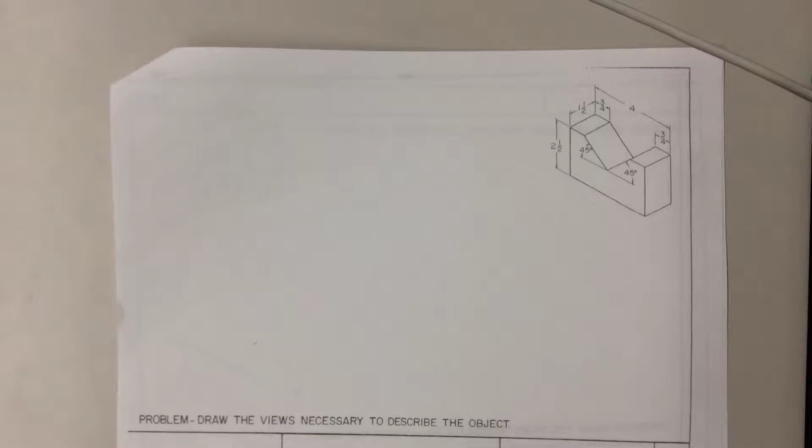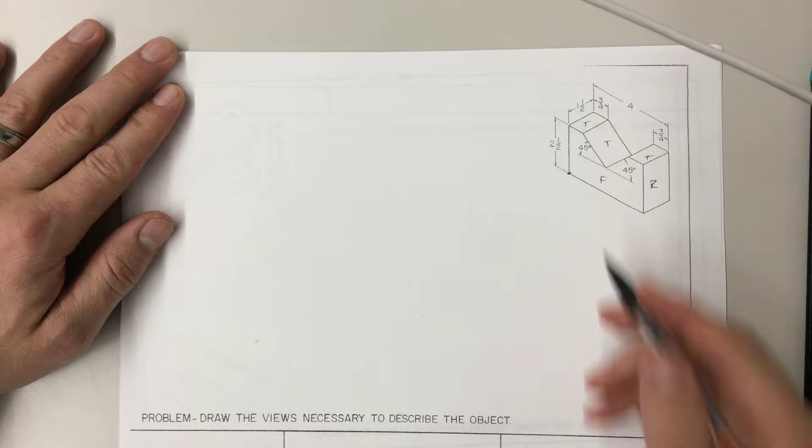Okay guys, back to these drawings. We're going to look first at our drawing. We always start at the bottom left. This is the front view, this is the top, this is the right. So for the front view, we'll start here, bottom left corner.

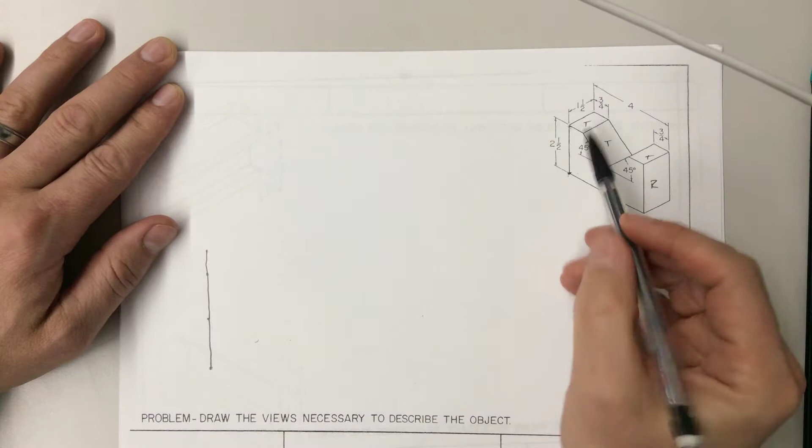What I'm going to do is look how tall it's going to go. It says 2.5, so estimate 2.5 inches, and it goes solid line all the way to the top. It's a dark line. Then we'll come over, it says right here 3/4 of an inch. So from here to here is 3/4 of an inch.

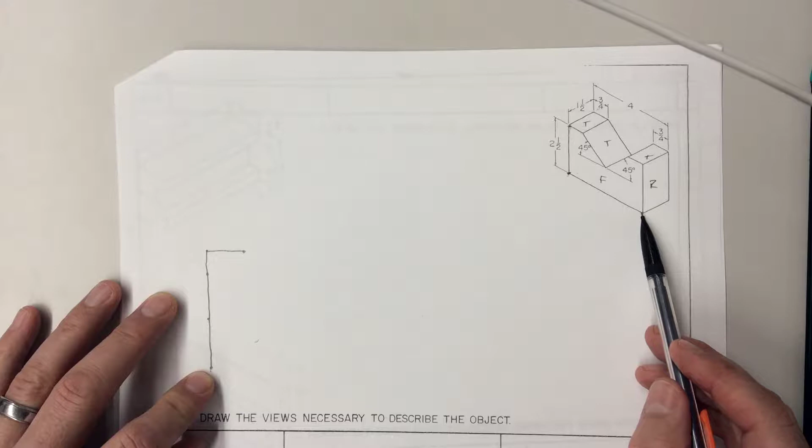Again, I'm estimating. I know it goes over. I'm going to stop right here. I'll do that here in a minute. I'm going to go back to my base point and go from my base point over. I know it's 4 inches, it says so. So from this line over to this line is 4 inches.

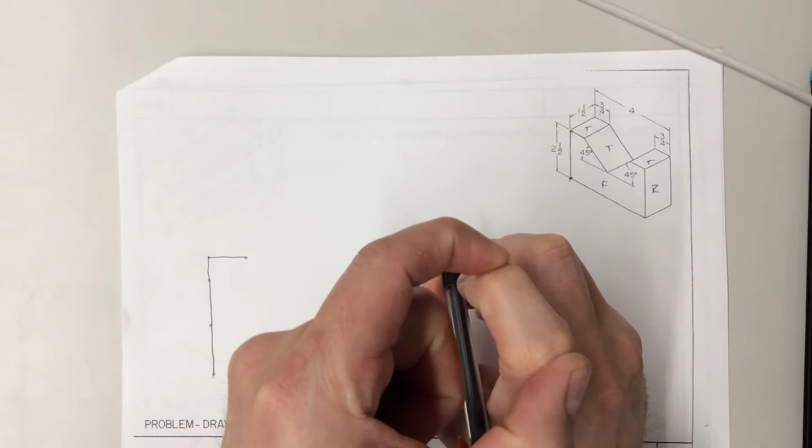Again, if you don't know how to estimate, use your little digit on your finger, right between this point and this point. It's about 1 inch. Again, we're estimating, so 1, 2, 3, 4, there's 4 inches. Now we know it goes the same height, so 2.5 inches up here is about 1, 2.5. Draw a solid line.

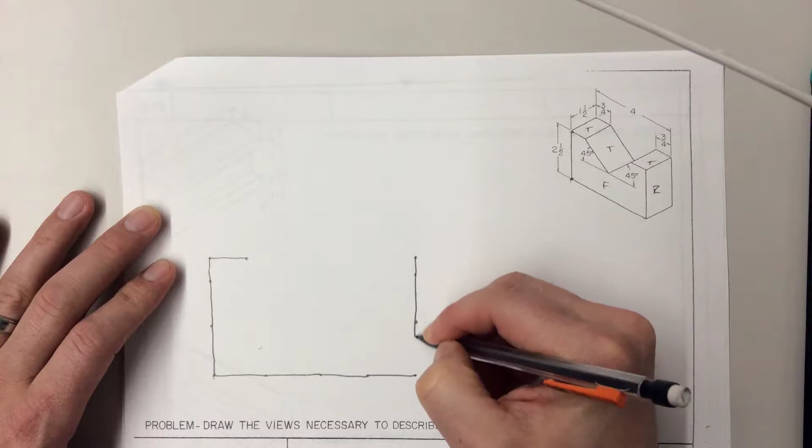Alright, we are here, same as it was on the left side. Now we're going to do the right side, which is 3/4 of an inch. Kind of like that.

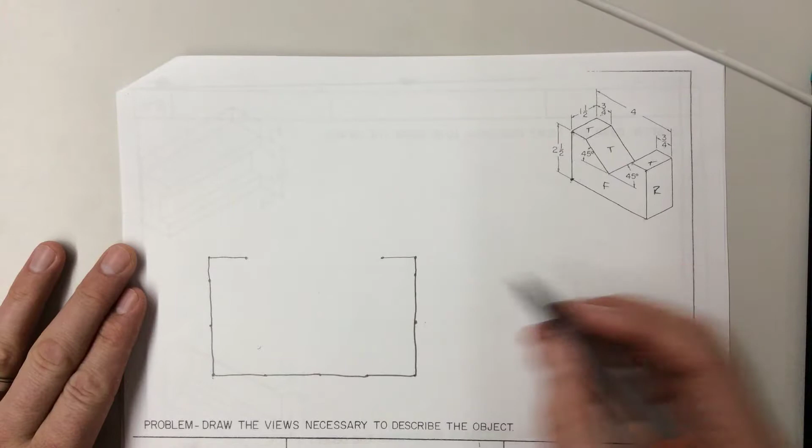Alright, so the next thing is going from this point and this point, coming down to a point. I know it's a 45-degree angle, so we're estimating as I come down, and where they both meet is where we stop. So I'm going to eyeball somewhere around the middle, and that is my 45.

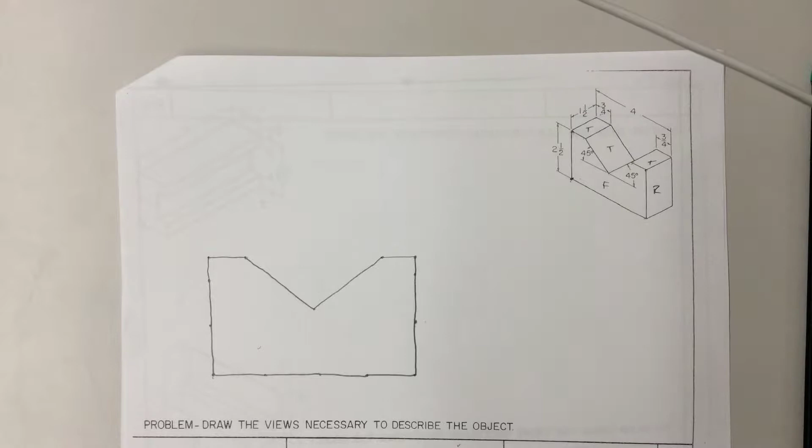That's my front view. If you remember, we're supposed to project up, over, and at a 45-degree angle. So I'm going to go ahead and do my 45-degree angle, estimating where it's at. These are all light lines, I'm drawing a little darker just so you can see them.

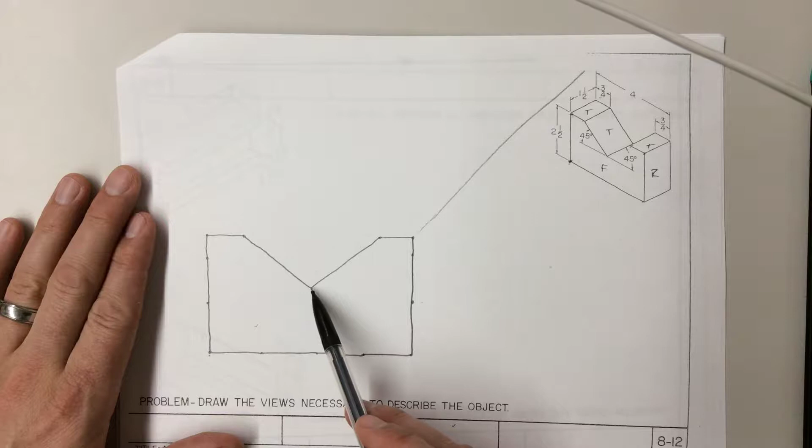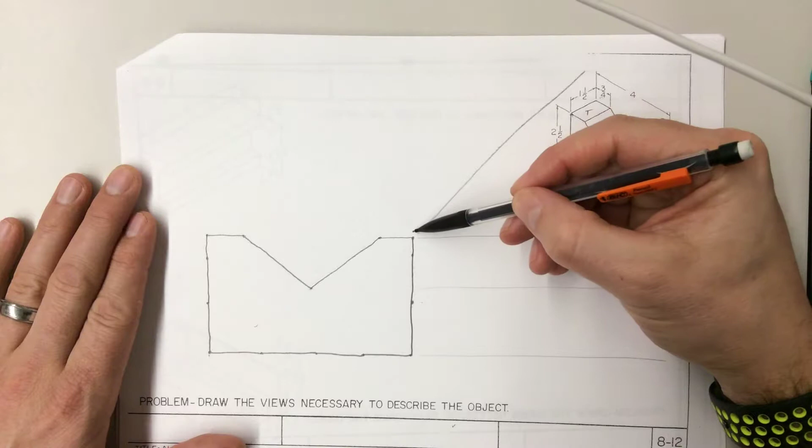All horizontal lines, or anything that changes planes -- for example, this point right here -- we're going to go to the right, and all vertical lines and change of points, we're going to go up. So here's the horizontal. This middle point of intersection is going to be another point, go just like that. Now all vertical, go up. Again, change of planes, this changing direction, so it's going to be one here. And then this point and this point is a change of direction, and then this last line right here.

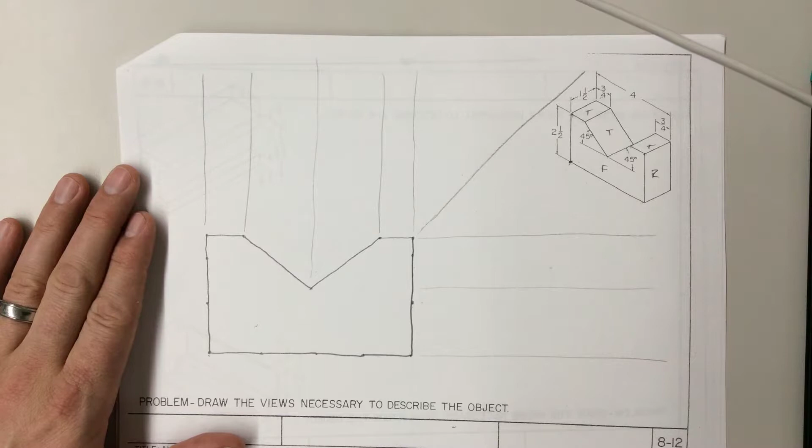From here, we want about 1 inch away from this front view, so we give some distance between the tops of these and the start of the next one. I'll go 1 inch above and start my next one. So right there is my new base point. I'm going to draw the top view, which is right above. That's why these projection lines are here, so we can go right above it. So this point is right here. I'm going to now draw this shape right here.

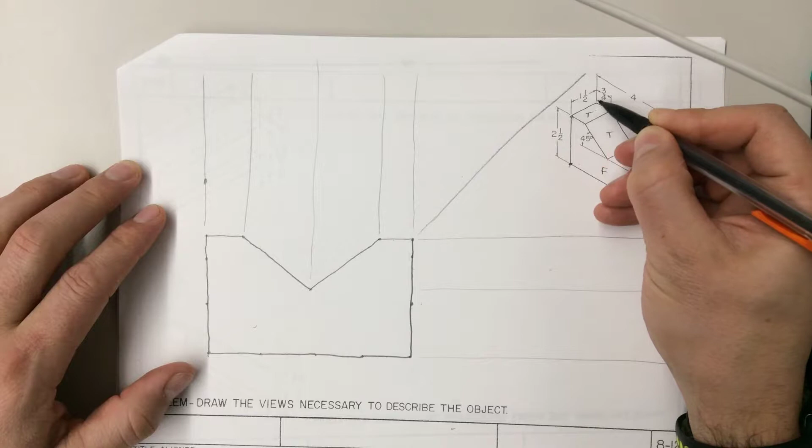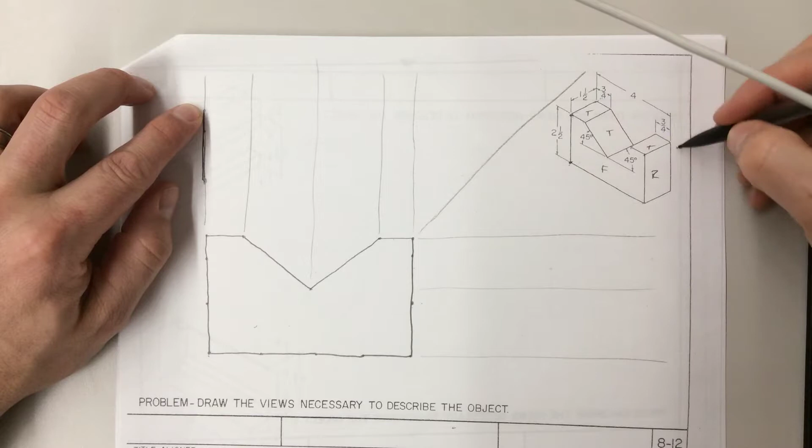We'll go from here to here, which is along this edge, 1.5 inches. So I'm going to go from here, measure up 1.5 inches, and that's a dark line. That's this line right here. Now I'm just going to come to the very end. We know the end is right here or right here. So I'm just going to go straight across.

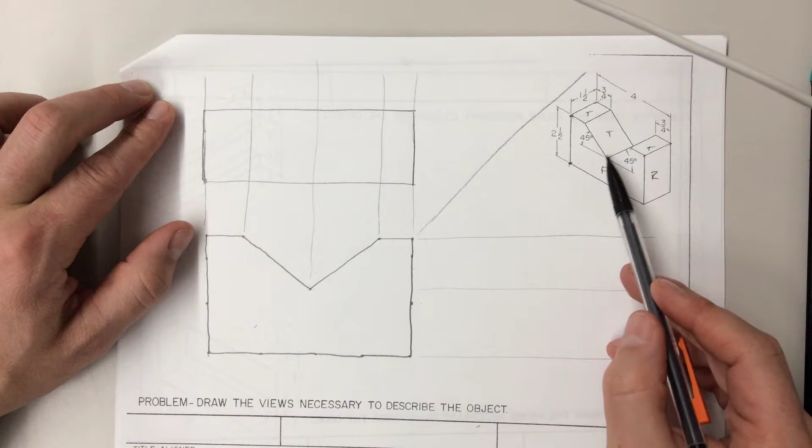We know we can go ahead and draw a box because that's the shape it's going to end up being, because it's not curved -- it's just from here to here is a straight line. Now there is an angle in it, but if you look at an angle from the top, it looks like a solid line. Now we have these 3 projection lines.

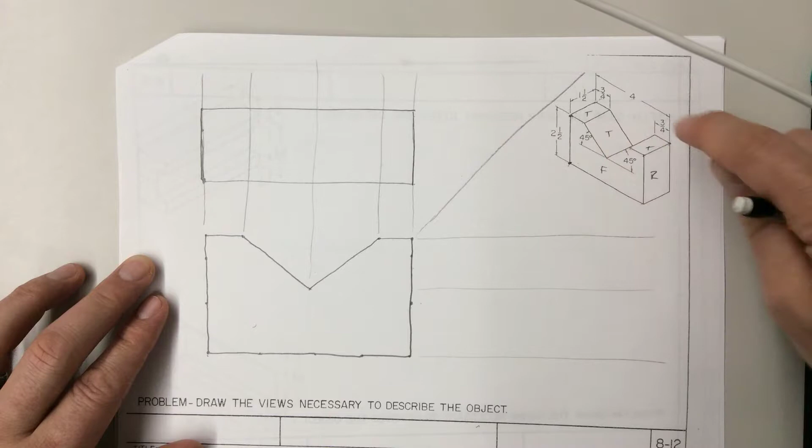For all projection lines, ask yourself, can you touch them? Can I physically touch that line? The answer is yes. Can I physically touch the crease that this creates by having two planes intersect? Yes. And then this line right here, the answer is yes. So all three of these are going to be solid lines.

Top view is finished. So I'm going to go ahead and do what I love doing best, erasing, and get rid of the stuff so you can see the final product of the top view. Now I'm not going to erase my right view or my 45 just yet, because we're still using them. But that's what our front view and top view should look like on this drawing.

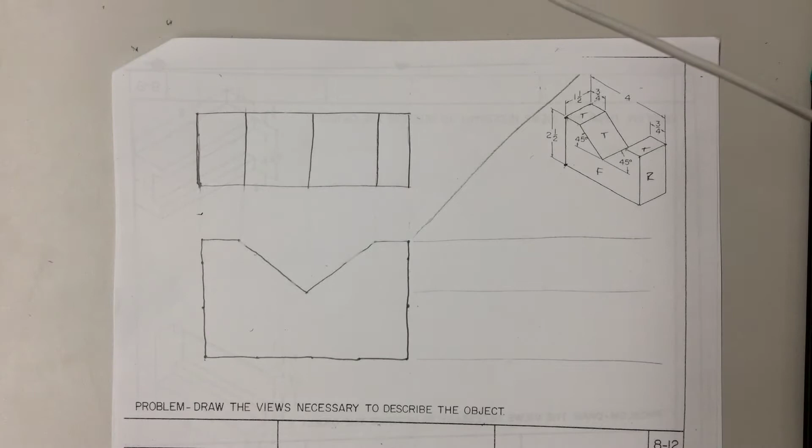From here I'm going to take all horizontal lines on the top view, come over and hit. If you notice, there's only two, so I'm only going to hit two lines, like so. Where they hit the 45, we come down with them.

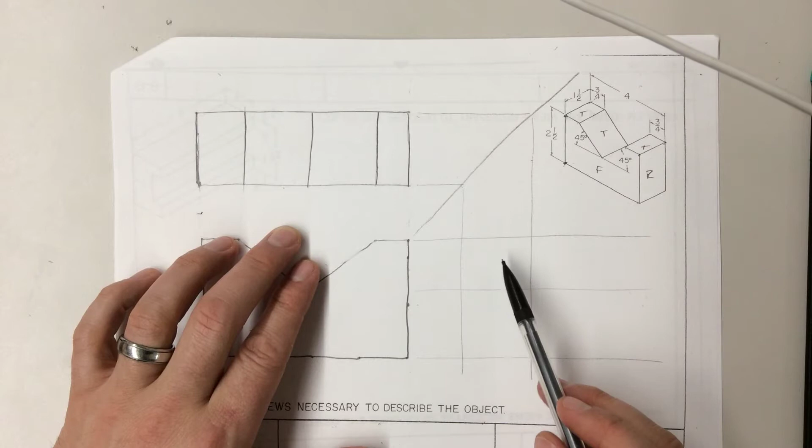So right here, this is the top of our object. Here is the bottom. This line is the left side of it, and this side is the right side of it. So if you look, we're drawing the right view. It looks like a rectangle. It's already built for us. So let's go ahead and use all the projection lines given to draw that little rectangle.

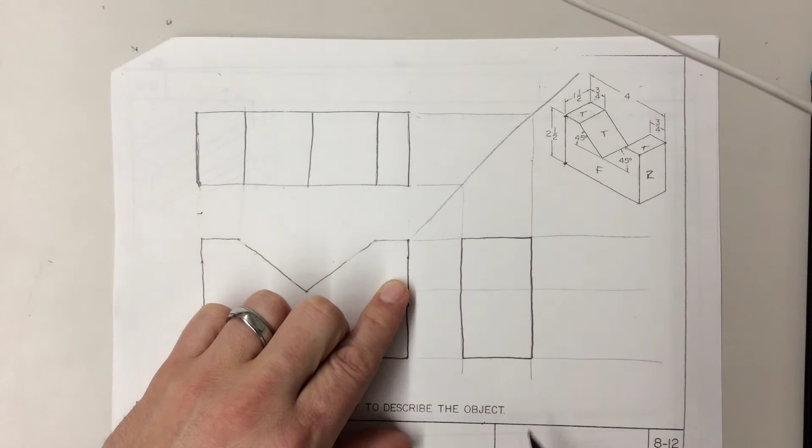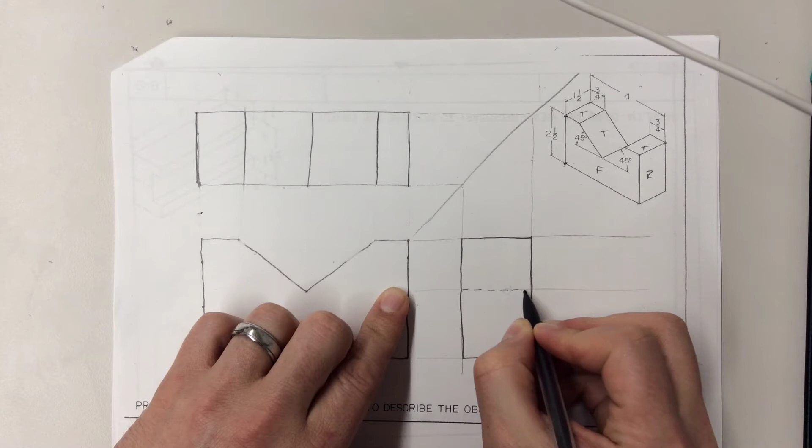Now there's one more line in the middle. Again, we have to ask: can I physically touch this crease right here from the right side view? The answer should be no. So it's actually going to be a hidden line, a small dash -- 1/8 inch drawn line, 1/16 inch gap. So that's your right view.

So that's basically it, so let's go ahead and erase these. Once we're done erasing the projection lines, we are good to say this drawing is finished. Again, make sure you have a good eraser so it doesn't smear, or just draw really light and you won't have to worry about erasing too much. But the harder you draw, the more erasing you're going to have to do.

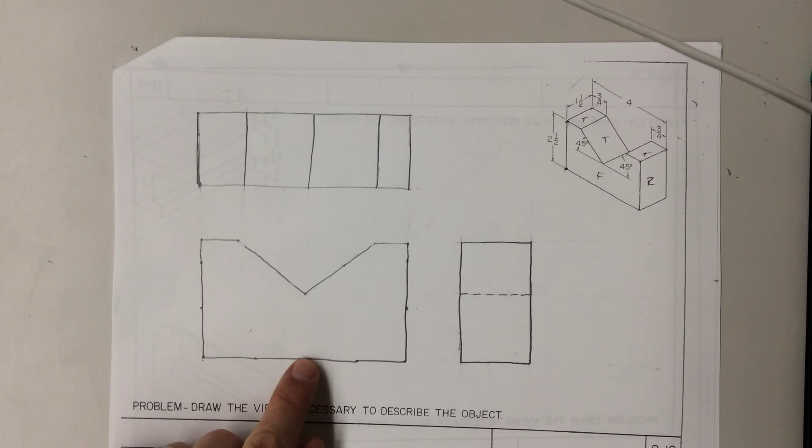So try to just draw lightly from now on. I was drawing heavier so you could see this. I'm going to go ahead and fill that in and make it clean. There you go -- there is your front, top, right side view. Okay, we'll move on to the next one.